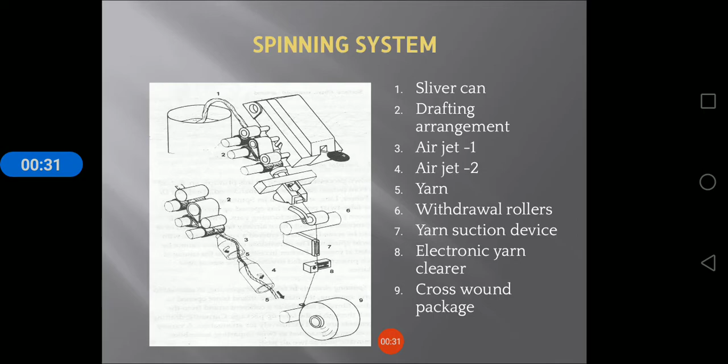The parts of this Murata machine are the sliver can, drafting arrangement, Air Jet 1, Air Jet 2, yarn withdrawal rollers, yarn suction device, electronic yarn clearer, and cross wound packages. The sliver from the can passes through the drafting arrangement, and then the material passes through the air jet spinning machine. These are the parts and operating principles.

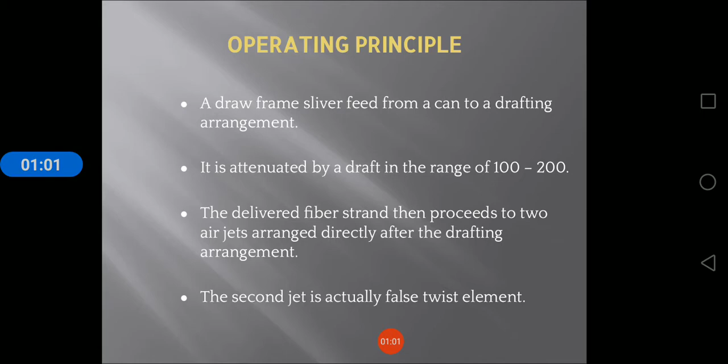Draw frame sliver is fed from a can to a drafting arrangement. It is attenuated by a draft in the range of 100 to 200. The delivered fiber strand then proceeds to the two air jets arranged directly after the drafting arrangement. The second jet is actually the false twist element.

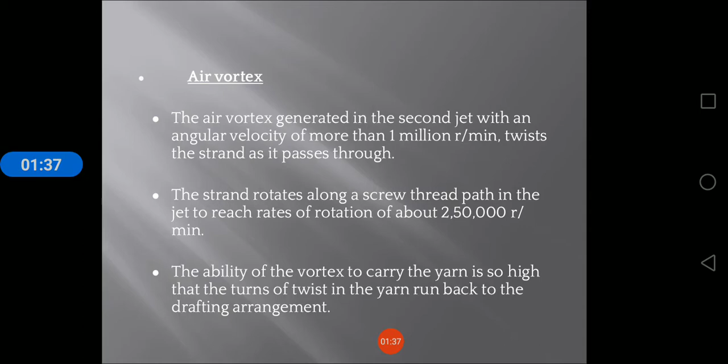Air vortex. The air vortex is generated in the second jet with an angular velocity of more than 1 million revolutions per minute. It twists the strand as it passes through. The strand rotates along a screw thread path in the jet to reach rates of rotation of about 250,000 revolutions per minute. The ability of the vortex to carry the yarn is so high that the turns of twist in the yarn run back to the drafting arrangement.

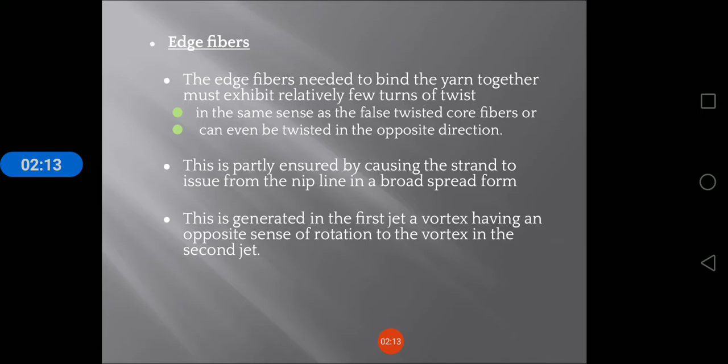Edge fibers, the fibers needed to bind the yarn together, must exhibit relatively few turns of twist in the same sense as the false twisted core fibers or can even be twisted in the opposite direction. This is partly ensured by causing the strand to issue from the nip line in a broad spread form. In the first jet, a vortex is generated having an opposite sense of rotation to the vortex in the second jet.

The first air vortex is weaker in intensity than the second. It cannot affect the core fibers, but it can grasp the edge fibers protruding from the strand at one end. Since the first vortex acts against the twist direction generated by the second jet, the following occurs.

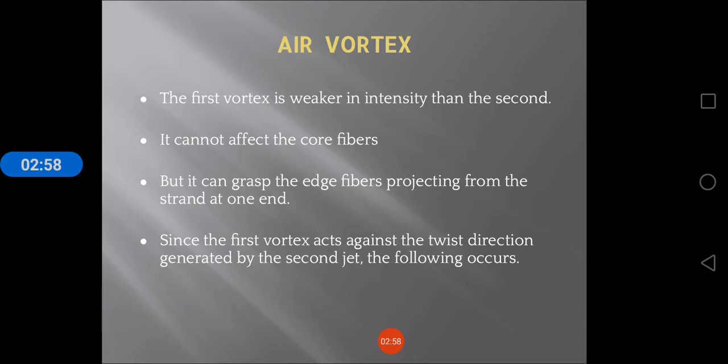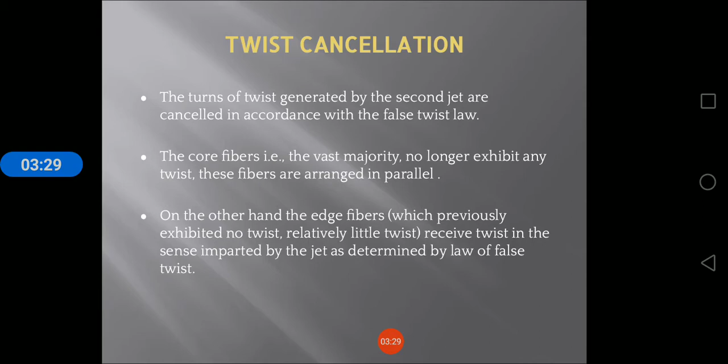Twist cancellation. The turns of twist generated by the second jet are cancelled in accordance with the false twist law. The core fibers, the vast majority, no longer exhibit any twist. These fibers are arranged in parallel. On the other hand, the edge fibers, which previously exhibited relatively little twist, receive twist in the sense imparted by the jet, as determined by the law of false twist.

Withdrawal and winding. The edge fibers are therefore wound around the fiber strand. They bind the body of fibers together and ensure coherence. The resulting bundled staple fiber yarn passes from the withdrawal rollers through a yarn suction device and electronic yarn clearer. Then it is wound into the cross wound package.

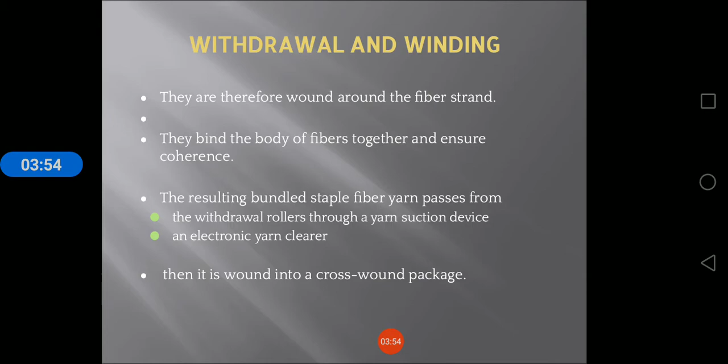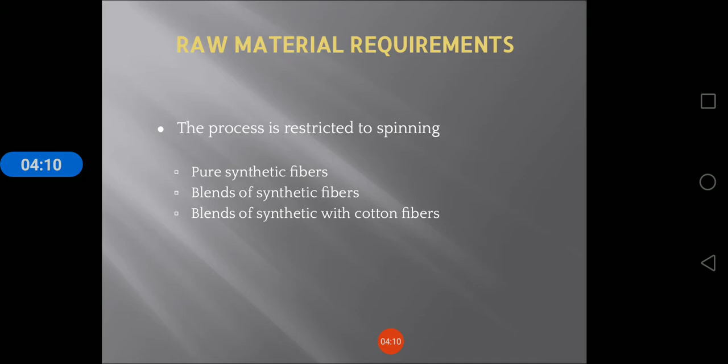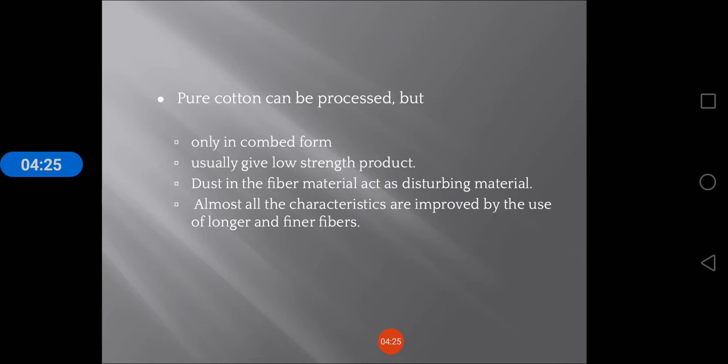Distribution of twist. Raw material requirements. The process is restricted to spinning pure synthetic fibers, blends of synthetic fibers, and blends of synthetic with cotton fibers. Pure cotton can be processed, but only in combed form, and usually gives a low strength product. Dust in the fiber material acts as a disturbing material. Almost all the characteristics are improved by the use of longer and finer fibers.

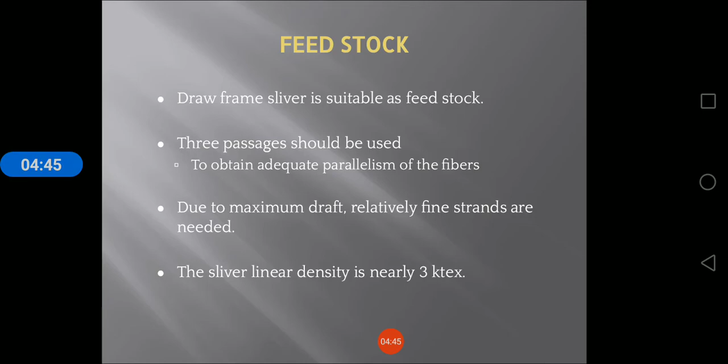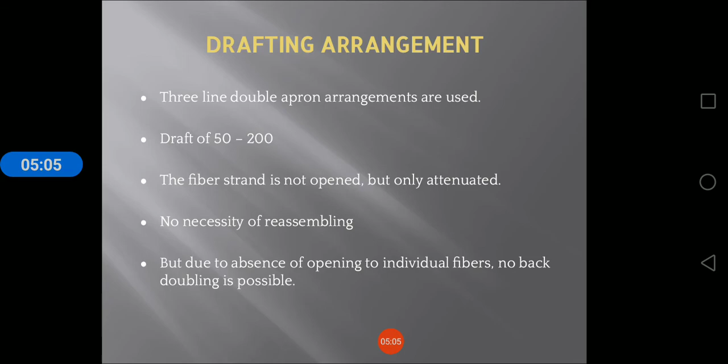Drafting arrangement. 3-line double apron arrangements are used, with a draft of 50 to 200. The fiber strand is not opened but only attenuated, so there is no necessity of reassembling. But due to the absence of opening into individual fibers, no back doubling is possible.

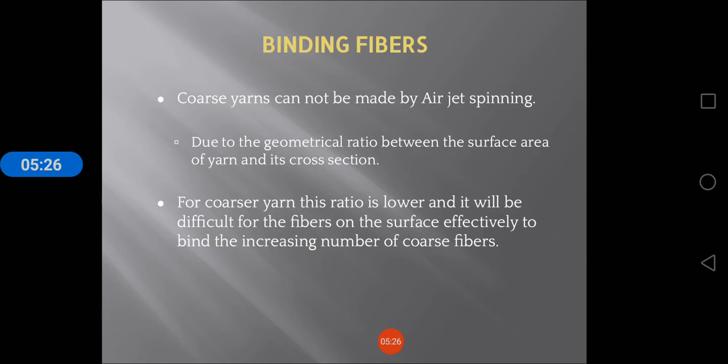Binding fibers. Coarse yarns cannot be made by air jet spinning due to the geometrical ratio between the surface area of the yarn and its cross section. For coarser yarn this ratio is lower, and it will be difficult for the fibers on the surface to effectively bind the increasing number of coarse fibers.

Specifications: number of spinning positions, 60 per machine; raw material, synthetic fibers and blends, combed cotton; range of yarn count, 10 to 40 tex, 15 to 60 count; feedstock, draw frame sliver; delivery speed, 120 to 300 meters per minute; and yarn type, bundled single yarn.

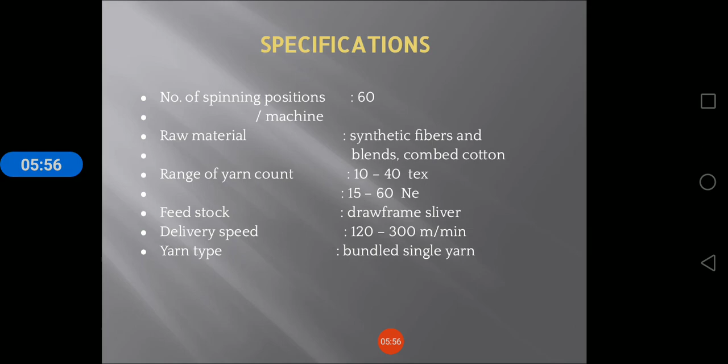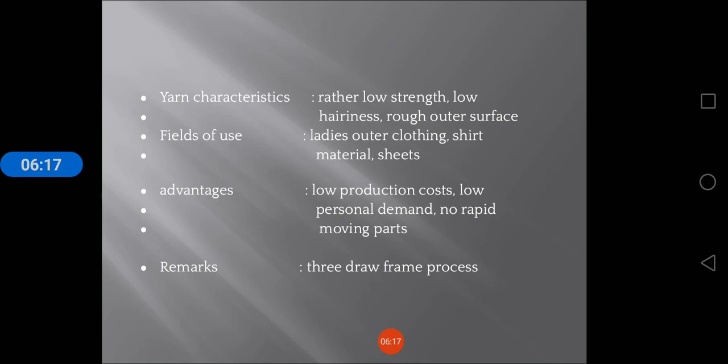Yarn characteristics: rather low strength, low hairiness, rough outer surface. Fields of use: ladies' outer clothing, shirt material, sheets. Advantages: low production costs, low personnel demand and no rapid moving parts. Remarks: 3 draw frame passages. These are the manufacturing technique of the Murata air jet spinning.